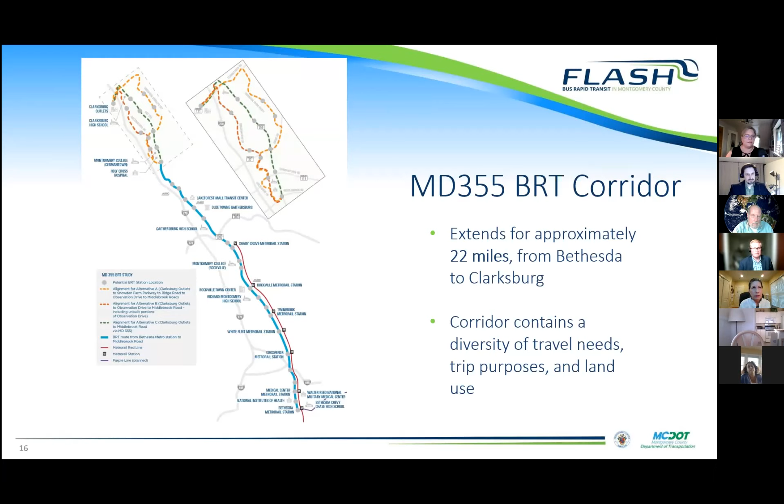So you guys have seen this map many times. This is the corridor. It extends 22 miles from Bethesda to Clarksburg. It contains a diversity of travel needs, trip purposes, and land use. We are urban down in Bethesda, and we go all the way to almost rural and ex-urban up in Clarksburg. Next slide.

And here's another old figure for you, but it is one that we will continue to use as we go forward because it is so handy and it continues to be valid for our work. The project design segments, we are continuing to use these, breaking them down into 7, starting in the southern end in Bethesda with segment 1 and going up to segment 7 in Clarksburg. The preliminary engineering for this project is focusing on segments 2 through 6.

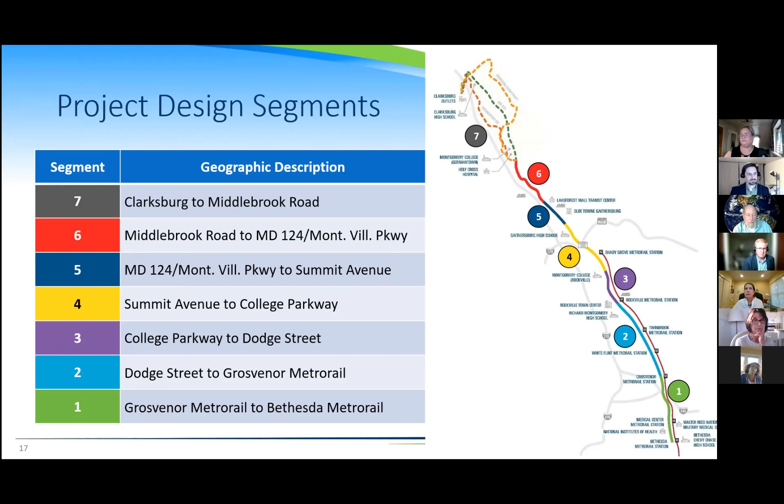And the reason we're doing this is because these are the segments which include the dedicated lane section, the most infrastructure requirements, the more challenging sections of the project, whereas segments 1 and 7 are operating in mixed traffic. However, BRT service could run beyond the limits of the dedicated infrastructure once construction is complete. Next slide.

So the phase 2 planning outcome, we heard a majority of support for alternative B modified, including from the County Council Transportation and Environment Committee. But there were some questions that we didn't ask, and we didn't ask the county to move forward with a locally preferred alternative. We solicited some additional feedback from stakeholders, such as the cities of Rockville and Gaithersburg. And consequently, our design ideas have evolved in a few locations and will be fleshed out as a part of preliminary engineering. And that's some of the detailed stuff that Randy is going to get into in a few more slides.

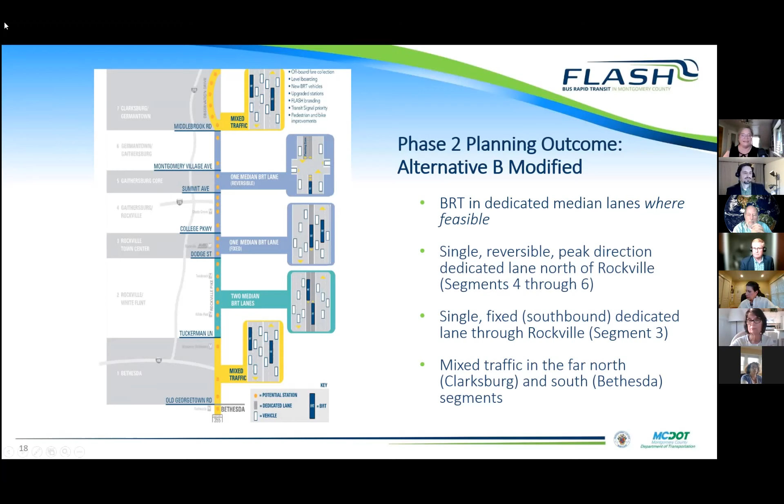One of the things I do want to mention is up in segment 7, up in Clarksburg and Germantown, our selected route was along Snowden Farm Parkway. And the reason we selected that location was because the bulk of the development has occurred over in that location. The other two options we had were along Maryland 355 or along Observation Drive. And as a lot of you know, all of Observation Drive has not yet been completed, and there are no plans for the construction of that roadway to date. And Maryland 355 up in the northern end does go down to a 2-lane, much more rural seeming road. So going over on Snowden Farm Parkway made more sense. Next slide, Randy.

All right, so project update and schedule. As I mentioned previously, the Maryland 355 BRT is entering preliminary engineering. So that is detailed design, and it will include the completion of 35% design plans, a construction schedule, and a more detailed construction cost estimate. As I mentioned, alternative B modified is the basis of design, with refinements being explored to enhance performance and reduce costs and impacts. In addition, the federal and state environmental NEPA process, which is the National Environmental Policy Act process, will occur in parallel with this design process.

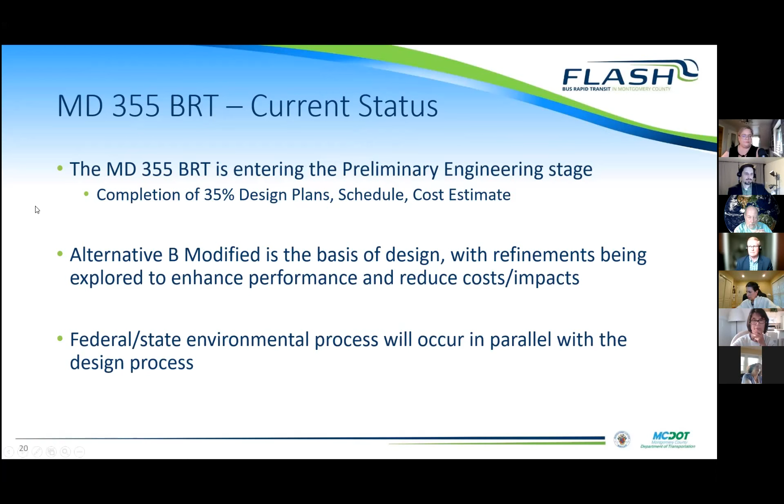Next slide. So we are here. In the blue box to the left, planning and conceptual engineering, is when we met last time. That was when we looked at all of the alternatives. We did traffic modeling, we developed the purpose and need, and we identified preliminary impacts.

Now we're moving forward into more detailed preliminary engineering, where we are going to look at performance and design refinements for the BRT. We conducted surveys, we're getting right-of-way plats, doing more detailed traffic studies and more detailed environmental assessments, and the schedule and cost estimate. And then what will happen next will be final design and then ultimately construction. And those two are not funded yet.

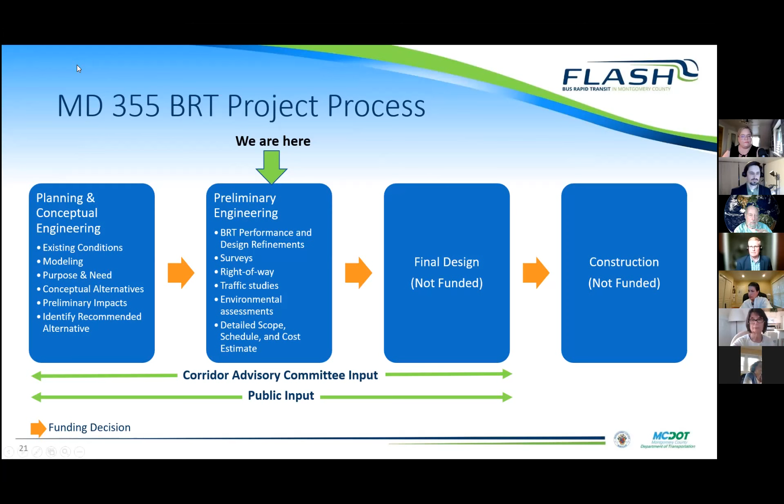Next slide. And here is a project timeline, which we have shown in the past, but now we've extended it out further to show where we are. The planning phase, which is shown here as phase 2, went on from 2017 to 2019. And now we are in the preliminary engineering phase, which is occurring now in 2020 and to be complete in 2022.

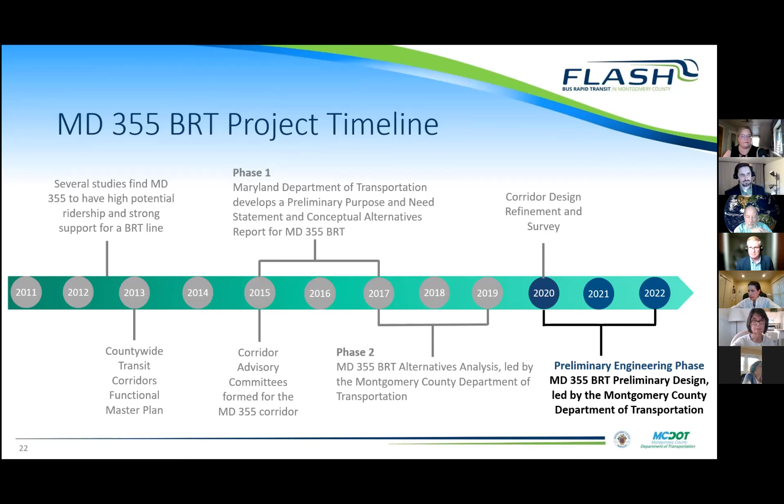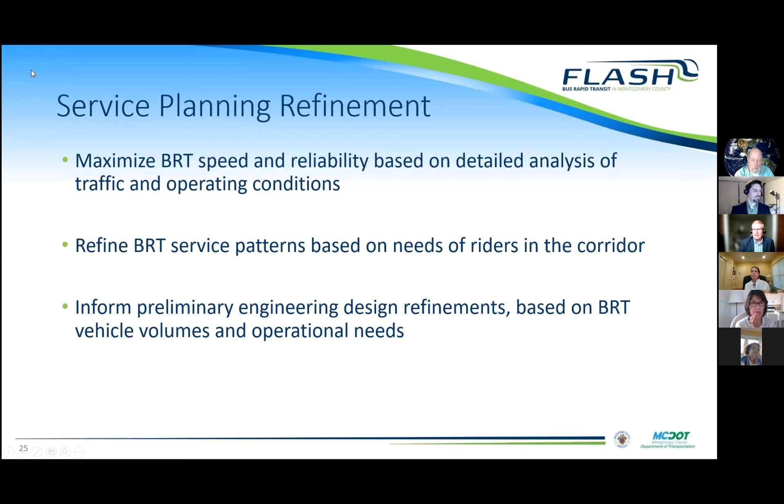Another issue we're looking at at the service plan level as we go through preliminary engineering is the shared segment of 355 that starts from the Rockville Metro Station area north to Montgomery College, Rockville. And this is where the 355 BRT project and the proposed Veirs Mill BRT project intersect, and will share a section of running way from Rockville north to the college.

So the 355 engineering team is taking the lead on the planning and design of infrastructure for both of these projects and how they need to interact. So we'll talk a little bit about the terminus area at the college when we get to that segment of the presentation.

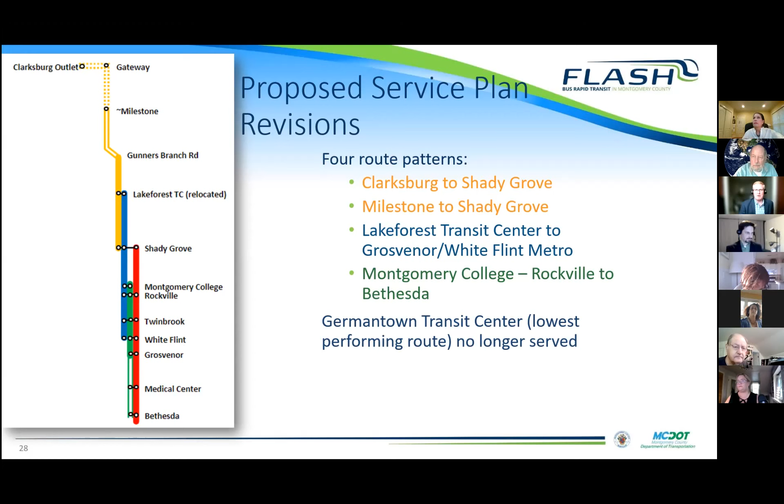Okay, well, Nancy, okay, you got your hand up. Okay, thanks. I'm seeing no hands. I'll go on to topic area number 2.

So I'm going to talk a little bit about the BRT running way refinement. So again, from a design team perspective, we're looking to take the roadway treatments that have been developed through planning phase 2 and see if there are ways we can refine and optimize those, in the interest of promoting a bus rapid transit system that has good speed, good reliability, that's going to make it useful and attract riders.

The other thing we're looking at is, as you probably know, some of the segments within the 355 corridor have proposed roadway widenings associated with them that create fairly significant right-of-way impacts and impacts on cost, both for improving the roadway and acquiring land to complete the roadway expansions. So we're trying to be strategic and look intersection by intersection, block by block through the corridor, and see if we can find ways to reduce some of those negative impacts on the projects and the communities.

And then, as I mentioned a moment ago, we're looking at technology strategies, design treatments, and intersection performance, both from the perspective of the BRT, but to the earlier comment, also looking at impacts on traffic performance. And really, our hope is that the design team can bring good thinking about the BRT design challenges, good design solutions, and good information that will support the decision-making process about how the project evolves and how it moves forward.

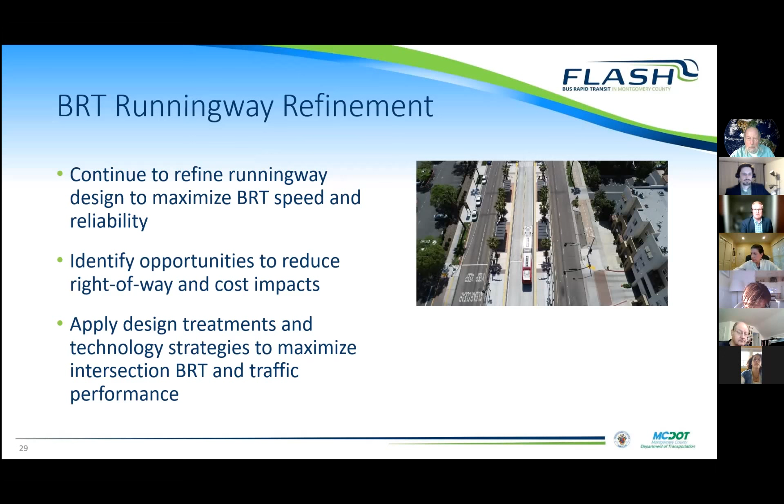So I'm going to talk about two segments in particular, segment 3 and segment 5, where we're digging in right now to understand some alternatives. So first we'll talk about segment 3. So this is really the heart of Rockville, the town center area. I've got the mini excerpt from the map that Danny showed you towards the beginning of the presentation that shows that in the alternative B modified proposal coming out of phase 2, this was proposed to have a single dedicated BRT lane running through the center of the roadway that would operate at all times in the southbound direction.

What we're looking at now is seeing if there are ways we can use essentially the same width of real estate that this option would use, but provide additional benefits for travel in the northbound direction. So being a little more creative, block by block, intersection by intersection, and the design team's working through what that alternative might look like at this time.

The other thing we're needing to consider here is, as I mentioned several minutes ago, this is the segment where the 355 and the Veirs Mill BRT projects start to come together. So it's a relatively high volume of vehicles. It's important from an operations and travel time perspective for both of the projects. So we're trying to do it right while still having minimal impacts on the constrained right-of-way through this segment.

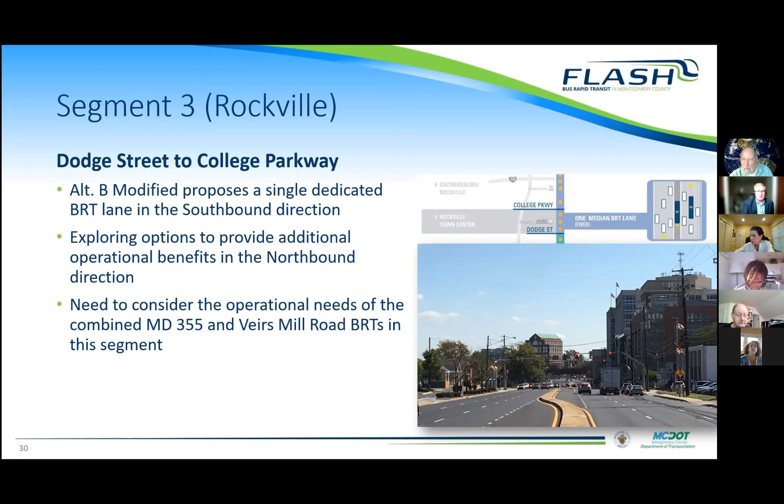The other segment we're looking at very closely right now is segment 5. So this is up in the core of Gaithersburg, from Montgomery Village Avenue down to Summit. In alternative B modified, this was also a single lane, but the idea was that this would reverse by time of day, and basically the flow of the BRT lane would be in the direction of peak travel. There's been a number of comments from the City of Gaithersburg basically asking, are there ways that we can reduce the impacts of this alternative on adjacent property owners, because this proposed alternative requires widening of the road right-of-way and impacts a number of the commercial and residential properties through this corridor.

So the City of Gaithersburg preference is to use more of a mixed traffic configuration, similar to what we have in the far north and the far south of the project. Of course, the flip side of that is making sure we can still get good speed and BRT performance through this segment. So the team's coming up with design alternatives that would take away the reversible single BRT lane in the middle and do something using more of a mixed traffic configuration with some more focused treatments to improve BRT speed and reliability. And then we'll see how this performs both in traffic and BRT terms, as well as reducing impacts on the adjacent property owners, so that we can have the discussion about which alternative makes sense to move forward.

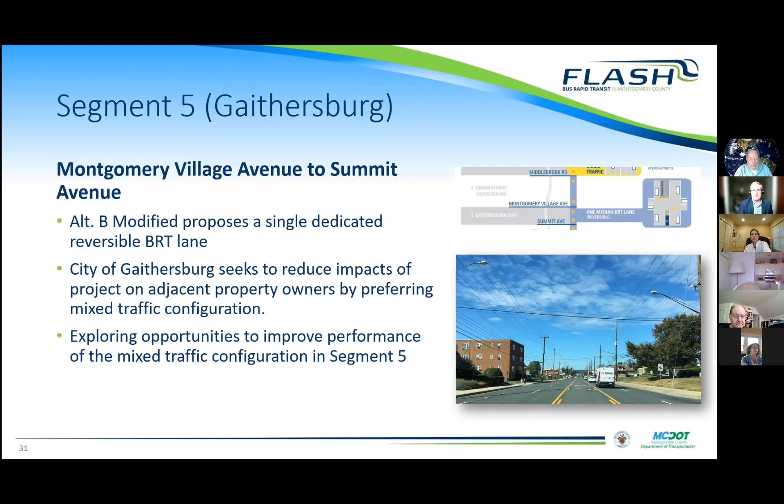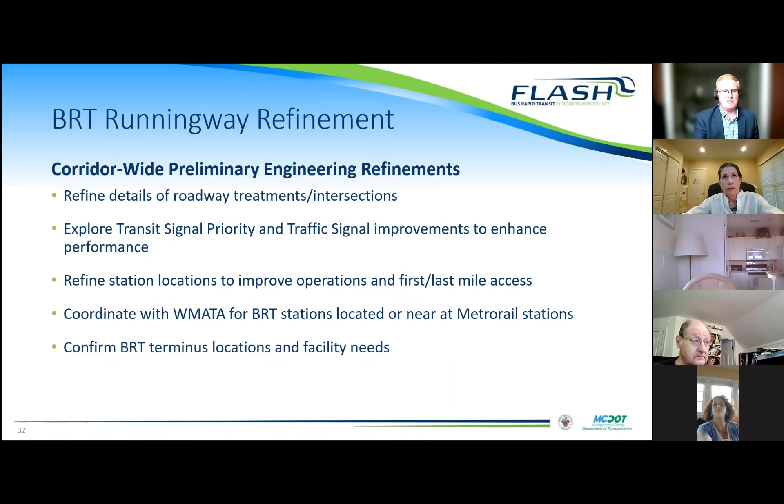Okay, so just to wrap up the running way, so corridor wide, again, in the spirit of kind of digging down into the details of the system, we're looking really from top to bottom of the alignment at opportunities to refine the engineering design. So some of the intersection treatments, the lane configuration at different intersections, the placement of stations and the proximity to the signalized intersections. Again, transit signal priority and traffic signal strategies, signal coordination strategies, trying to introduce some of the more innovative treatments that have been used in BRT corridors in very constrained environments.

We're looking at station location with respect to both operational concerns as well as the access of passengers. We like to call the first last mile access. So, how convenient are the stations as proposed for people walking to and from destinations in the corridor? And can we improve on those? Can we improve safety, et cetera?

In the number of stations where we have proximity or we're co-located inside a WMATA Metro Rail station, we've been having discussions about what their vision is and how we can improve the kind of the physical relationship of the BRT station with Metro Rail, make sure they're good, convenient, and safe connections.

And then, looking at some of the BRT terminus locations, we'll talk about that a little bit here for some of the refinement areas along the corridor, but, understanding where we can terminate routes, layover vehicles, provide driver support facilities, load passengers at the endpoints, and so on. So these are all really active conversations going on from top to bottom in the corridor. So we head towards 15% and beyond.

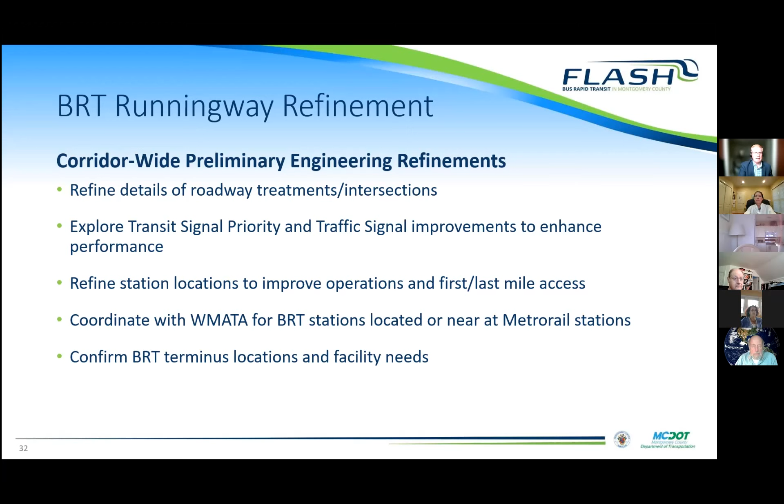Okay, so just to kind of conclude, I alluded to this earlier in the question and answers, but we're trying to bring forward some design analysis and traffic operational analysis for the alternatives that are being developed at this time, and conducting detailed analysis of traffic operations, intersection performance, and the BRT alignment. And this will be information coming forward as we meet in the coming months to talk about some of the opportunities and trade-offs here.

And then we'll try to take the good ideas, move them forward, and incorporate them into the design. Others, maybe good to just have evaluated how they performed, or what the options may have been, and maybe some ideas we don't adopt. But we'll try to bring information to the table.

David, is your hand up again? Yes, thank you for giving us, and I assume it's just a thumbnail sketch of the conversation you had with officials in Gaithersburg. Could you give us an equally brief thumbnail sketch of the conversations you had with officials in Rockville?

Sure. I've had the least long-running conversation, so Corey may want to weigh in here. But I think generally the idea of taking the existing right-of-way width we have for the proposed one-lane BRT alternative and trying to be a bit more creative with it, trying to get benefit in both the north and southbound directions was something that was well received.

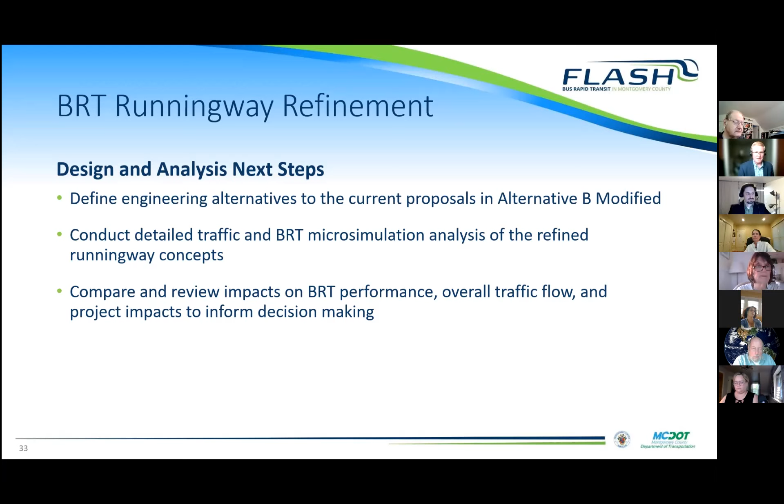Okay, speaking of going forward, I'll try to hit the last area of our discussion. So these are some of the alignment and station refinement areas: Shady Grove, Montgomery College, Rockville, and Lakeforest. I'll try to get through all this fairly quickly and leave at least a couple minutes for open discussion at the very end of the meeting tonight.

So Shady Grove is the highest ridership station within the 355 BRT system. And in large measure, that is the commuter connection from the north feeding into the Metrorail station. Obviously, there's a lot of transit that converges at Shady Grove, and it's an important regional community connection and mobility connection for the county.

We're looking really at the big picture. How can we make that connection that so many people use as convenient as possible, and in particular trying to improve upon the proposed BRT station location that's on Somerville Drive. I'll show a map in a moment if you're not familiar with the area.

And the other thing we have to consider is Shady Grove is not located right on 355. It's just a little bit off to the east, and every time a bus diverts off 355 to go to Shady Grove and then has to get back, that's potentially not advantageous for passengers who just want to go straight north-south and go past Shady Grove as fast as possible. So we also have to consider that not everybody's trying to go to Shady Grove, but they need to pass through the area. So how can we help them as well?

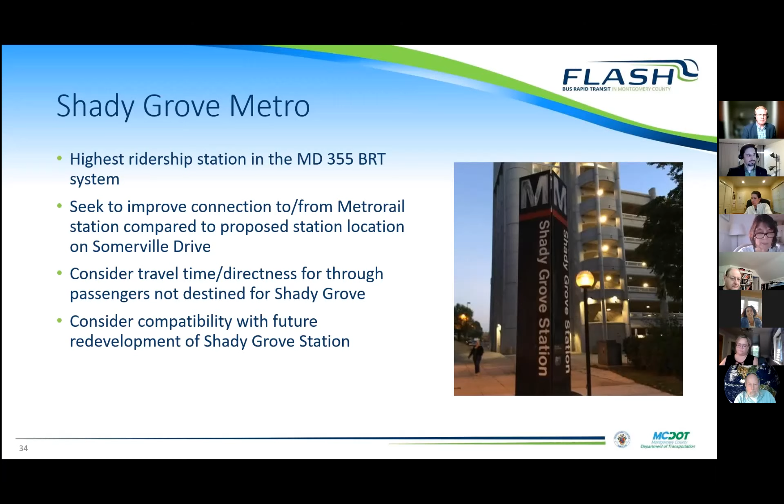The good thing about that is obviously it's very, very convenient for folks going into and out of the Shady Grove station, but it would require taking this gold line and really extending it even further off of 355 at the cost of a few minutes of travel. However, in the new proposed service plan, we have our gold route that actually terminates at Shady Grove. So this would actually be the end line stop for the service pattern on the gold line going to points north. So it could work out really well.

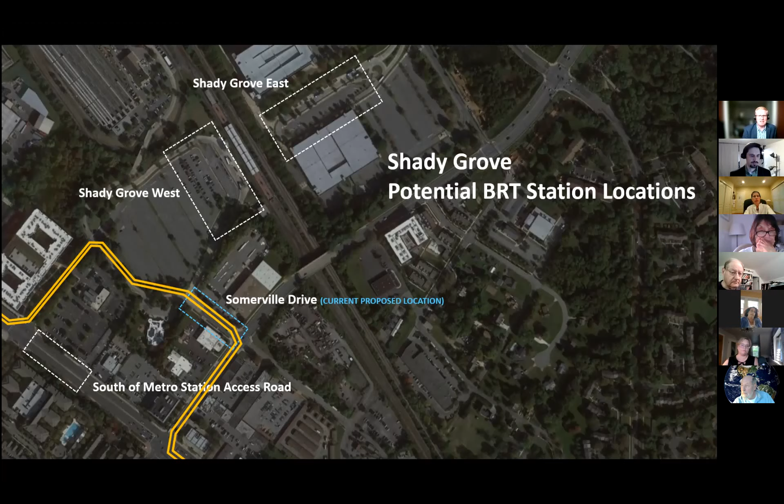So that's kind of part of the vision, is to just recognize not everybody wants to be taken to every destination, every stop along the alignment, and can we find ways to fine tune and reduce the amount of overall delay for passengers. You'll see a little more of this as we talk about some of the other areas, and I'll just kind of move forward into those just to make sure I get things done on time.

So the second of the three areas is around Montgomery College Rockville, and obviously this is another important connection for education, access to education within the county, and we're really looking to make as good of a connection as we can for the BRT to the college. As I mentioned at the start of my presentation, this is also where we've got the Veirs Mill BRT terminating. So there are actually buses coming here. It's the last stop on the line. They need a place to park, lay over, turn around, get back into service, and head back to the south.

So that's happening while 355 buses are coming through. And we also have some 355 service patterns proposed to terminate. So there's just a lot of bus activity, including a lot of end of line bus activity happening around the college. The existing primary stop for transit at Montgomery College Rockville is in what's called the South Campus Drive area.

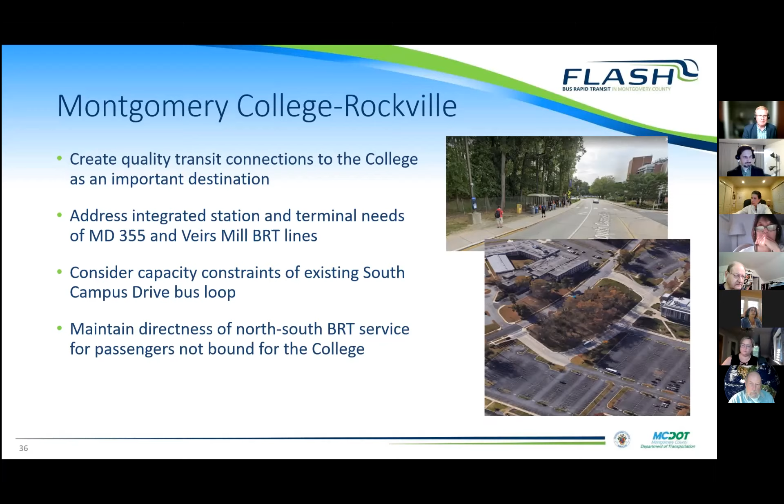We're looking at a couple of other locations as potential alternatives. So here labeled as that South Campus Drive bus loop. And again, it's got some capacity constraint concerns we're looking into. Also, it's itself a fairly long distance off of 355. So every bus that has to divert off of 355, make a turn, go to the campus bus loop, go back down Mannakee, get back on 355, continue on its way, is introducing a lot of delay for passengers who just want to go straight north and south, including all those people who just might be riding the line in the future, and also like to be passing Shady Grove and just getting a quick trip.

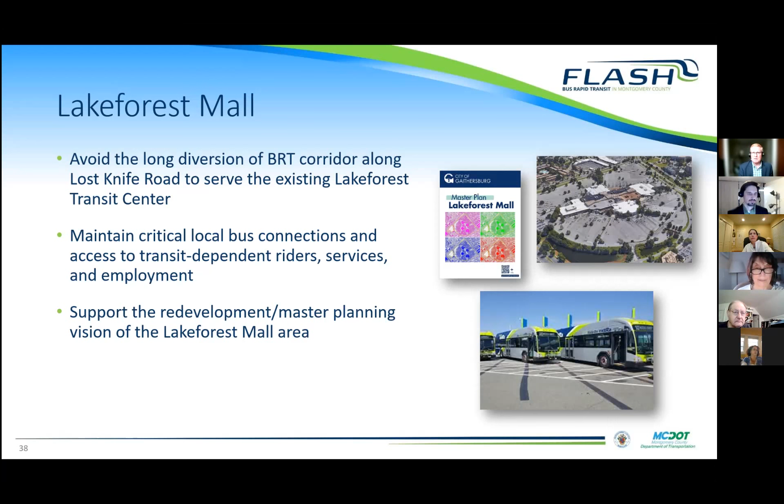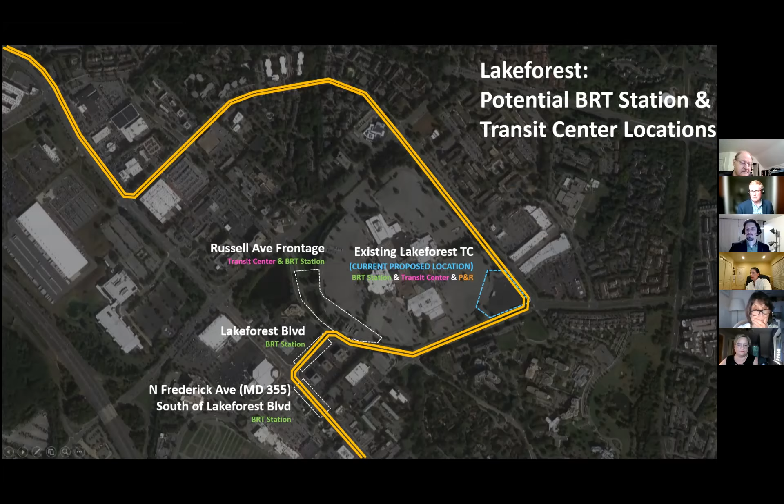Okay, I see Richard's hand. Yep, just a quickie, and this is one of the things you're talking about, traffic signals and so forth, and it's really a problem. And this is for Corey, to talk to his friends in engineering. Montgomery County has among the worst traffic phasing concepts I've ever seen, because it's all fixed cycles and things like that in many places. But they don't consider bus rapid transit at all.

Now, like Ride On Extra, the big thing I'm aware of, not for a year actually, of course, is Medical Center Station. When that was running in full force, that was the terminal point for the Ride On Extra, the 101 plus the local buses, and they have the signals very short coming out of the NIH property. So there's practically no traffic on Rockville Pike when I get there, which is sort of in the sixes range, but it could take 2 cycles, in one case 3 cycles, to get out of the space,

just because of, depending on what Walter Reed does with turning traffic or this or that, and they just leave empty time on Rockville Pike when it could be used by buses coming out, and that's just not the way they configured it, which is to keep Rockville Pike moving even though there's no traffic and a backup of buses.